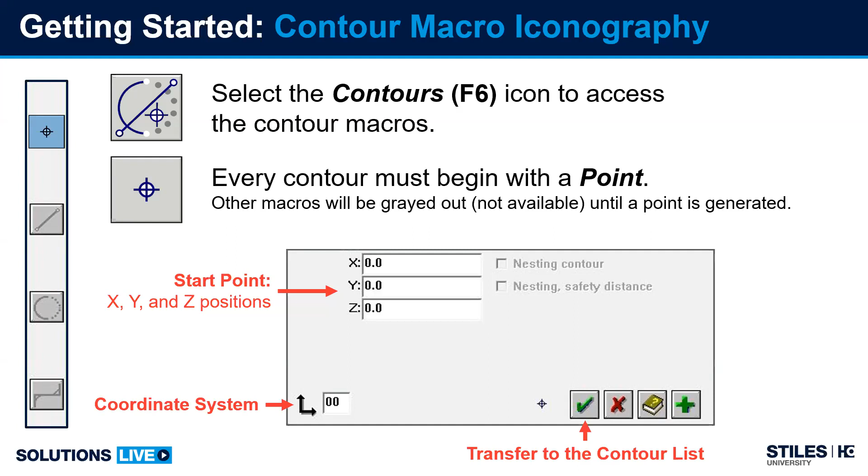So when it comes to lines, you have two options. The most common line is the endpoint. It's going to ask you where do you end in X and Y, but we have the ability to turn on the additional parameters and select a Z move. The other option is to determine how long is the line and what angle are we cutting.

So again, this is a valuable tool. I'm not certain that it's used that often, but again, it's a tool that's available for you. And again, we can make Z-axis moves with that. So let's talk about Z-axis moves. You have two options. You can tell the router to end the line at some point in the Z. Probably used the most. It's definitely the safest move.

We'll talk about what happens when we pick the second option, which is pitch. Pitch is an angular move. It's rise over run. But you have to be very careful. You're telling a line to move in a specific dimension in X, Y, and depending on how long that line is, your angle could project the tool well below the panel. So again, I'll show you some examples. Just have to be aware, we don't use pitch very often, but if you know that you have an angular move, you already have that number, so we can use that.

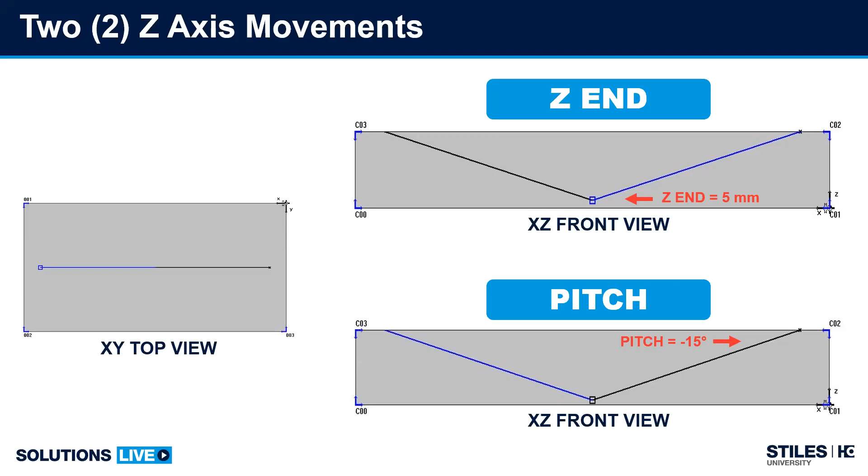So when we talk about arcs, you have 4 arc options within 5.0. Probably the first one, the arc radius and endpoint, is used the most. The arc 3-point is probably used second. So you can define the endpoint of the arc and what dimension is for the middle point. Very, very useful in creating things like valances. So I know the middle point of the valance, either the rail width or the height of the arc. I don't have to do any mathematics. I don't have to do any algebra to figure out what the radius is.

Now the middle two, they're very good for certain applications, but they certainly aren't used very often. So the arc center point endpoint is actually asking you where is the pivot. So imagine drawing an arc using a compass. You have to know where that pivot point is. So either you have to calculate that or you have to know that. So again, it's a useful tool, just not used very often.

Along with that, the third option: what is the direction of the arc, clockwise or counterclockwise? What's the endpoint? And what is either the starting or ending angle? Again, if you know the starting angle, that's great. If you know the ending angle, but without having to calculate those, we're back into the first or the fourth arc. Now, again, we can do Z-axis moves in an arc.

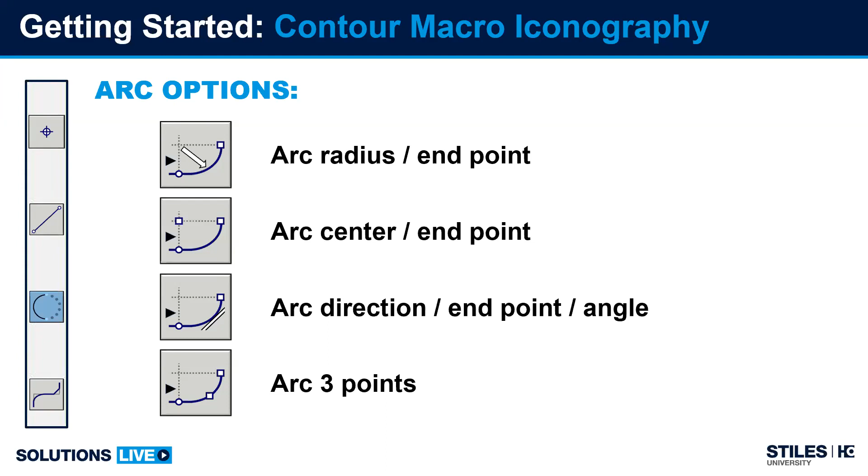And then the split is just the ability to take a contour line and cut it. So you can cut it at a percentage, you can cut it at a specific point. We may want to do this just because when the design was created, the start point really wasn't in a good spot. So we'll pick a long line and we'll actually cut that line in half. Once we've cut it, then that becomes a design element. So I can tell the router where to start in the contour split.

So again, let's talk about a caution. So here's two examples. I've got a pitch of negative 15 degrees. The top one is on a panel that's 50 millimeters thick. And then I did the exact same contour on a panel that's 25 millimeters thick. It doesn't take a woodWOP professional to realize that the 25 millimeter panel is going to be a very dangerous program to run. But there's a way that we can protect ourselves from this. The first one is definitely look at the front or the side view to actually see where the contour is moving in that Z element.

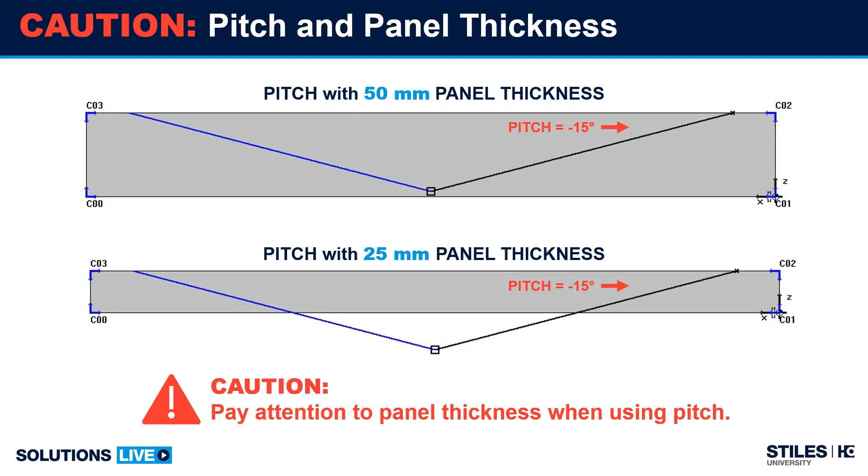So let's talk about how we protect ourselves. When you set up your tool, it's going to ask you for a length of the tool, that's the total. It's going to ask you for a collision length. For most of these applications, the collision length is the bottom of the tool where the tool's cutting. It gets a little more involved when you're talking profiling tools. But the working length is how much geometry do you have to work with. So if you don't set the working length correct, then the NC generator loses the ability to help protect you.

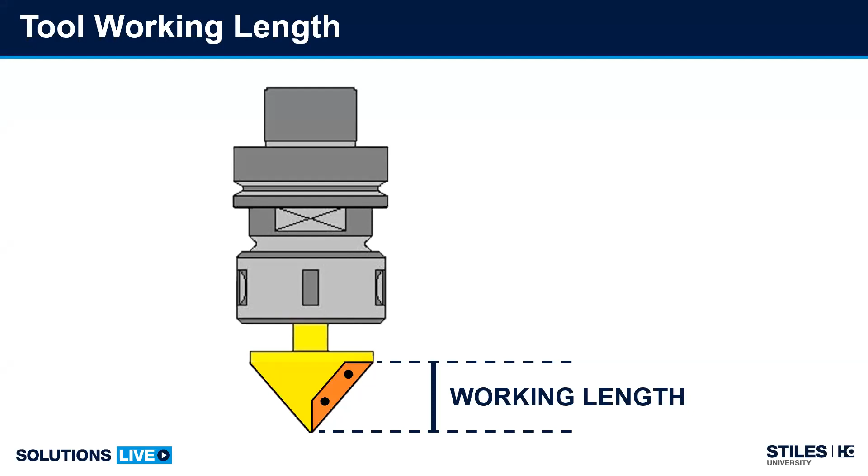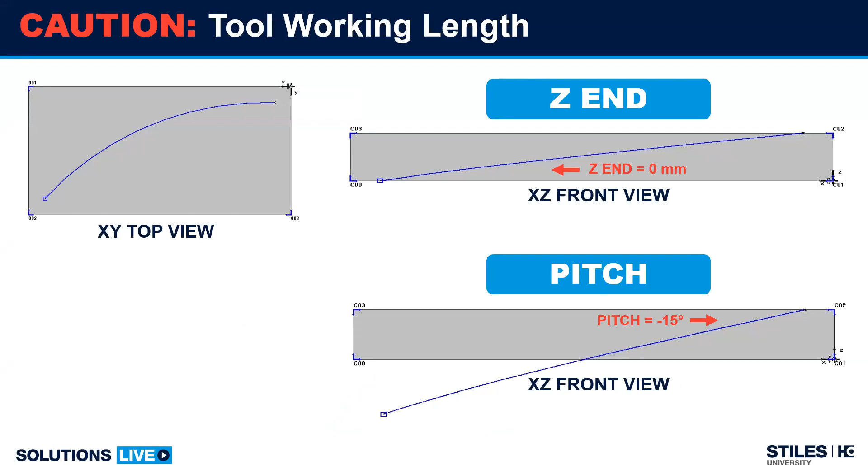So here's an example. The top view shows an arc, and then we have the Z end. I'm ending at the bottom of the panel, or Z0. But I did the same thing with the arc, only this time I did the pitch move, and I did a negative 15 degree pitch.

So here's my insert tool, and it's highly recommended if you're going to do these raised panel doors or these type of applications, try to get an insert tool. That way, when you replace the insert, the angle is always correct. If you get a carbide tool, every time they grind it, if they didn't get the angle exactly correct, whether it's a 45, a 90, or a 60 degree tool, you're going to have to go back and recalibrate that tool to make sure the corners are square. So again, try to get insert tools. It just makes them faster to get back into production. You don't have to recalibrate.

So here's an illustration of what happens with the working length. We know that we can follow down to this point, and at the top of the insert, that is the end of my working length. So in this case, if I had this tool set up and I push this through the NC generator and woodWOP, the machine's going to come back and tell me your tool's too short. You can't do this. But again, if I had lied to the machine and incorrectly determined the working length, I could easily take this tool and bury it into the panel.

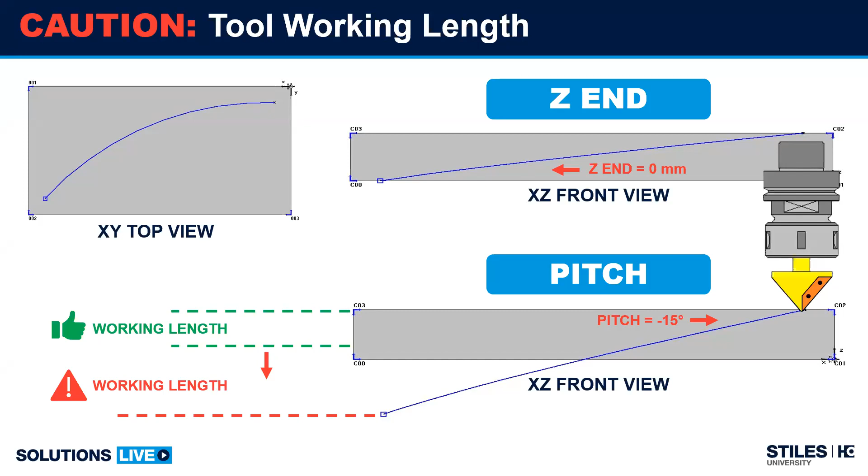At the best, I would just probably ruin the tool. But I could get to a position where I could push the collet nut and the whole tool holder into the top of the board, and now we're talking possibly misaligning the router motor, damaging the Z-axis ball screw. So again, Z-axis moves, you need to pay attention to what you're doing. They're not hard to do, but there's a few things you need to look at.

The last thing we need to talk about is what do we do with the Z dimension? So when we're cutting with a straight up shear, down shear tool, we can tell the router motor where to cut in Z, -2 millimeters because we're on a vacuum pod machine. We want to cut 10 millimeters above Z, but we're not moving in the Z dimension. So the tool stays at that position.

Anytime we do a Z dimensional move within the contour, our Z dimension on the router tool has to be relative. We have to put the @ symbol in there. If we don't, if we just put it at 0, then the tool's going to plunge to Z0, absolutely. It's going to follow the contour, but when it gets to the corners, it's not going to move up and down in Z. It's just going to move in a flat line to the corner.

So again, anytime we do a Z-axis move, the tool must be relative to the contour. So in this case, we put @0. If you want to cut a millimeter deeper, you could put @-1. So again, we have that ability.

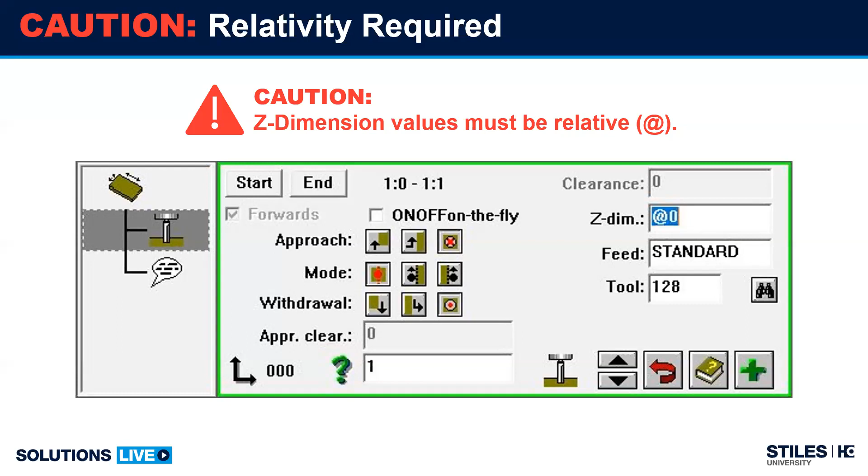So this is really what we're trying to do on this raised panel door. We want the tool to move to the corner, and then we have to do an X, Y, and Z move. My preference is to set up the parameters in the variable list so that I can control this very easily. So what we're ultimately looking for is this perfect corner. So when we make that XY move, if the XY movement is too small, then the tool comes up in Z, the corner is going to tend to bow in.

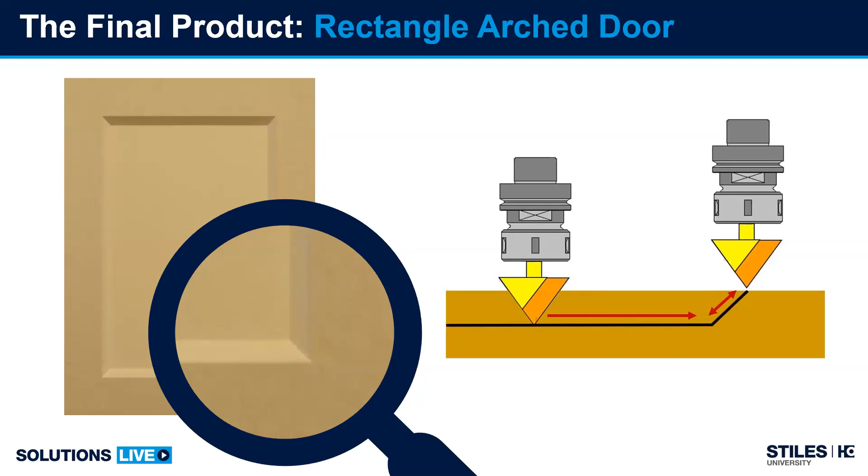So if you see the corner starting to have a small radius inward, we need to make that XY movement longer. If you see the corner starting to flare away or radius out from the corner, then your XY dimension is too long. So again, if we make a variable just for that dimension, it makes it much easier to calibrate this. And once you get one corner perfect, then naturally the other 3 corners are going to fall in line.

So here's my variable list. So you'll notice I have a V tool and a V feed rate. I want to be able to change that V point tool. So maybe I'm going with a 45-degree tool, maybe it's a 60-degree tool. The 60-degree tool, you may have to do a little calculation to figure out what that XY movement is. I want to control the feed rate. Am I cutting this into a plywood door? Am I cutting it into hardwood? Am I cutting into MDF? I want to be able to control that feed rate.

So we want to be able to control in inches, the length, the width, and thickness of the panel. And then I have 3 very important variables for me. RS. So in this case, I decided to make a panel that was completely balanced. So rather than having stile left, stile right, rail top, rail bottom, I just made a variable for rails and stiles. So whether they're 2 inches or 2.5 inches, I change one number and the whole drawing changes.

I have a profile depth. How deep do I want that tool to provide that profile? So in this case, we're using a 45-degree beveling tool. I want that profile to be 1/2 inch deep. And then the last one we talked about, I need a variable for XY. How do I move the tool in the corner? How do I produce that up movement?

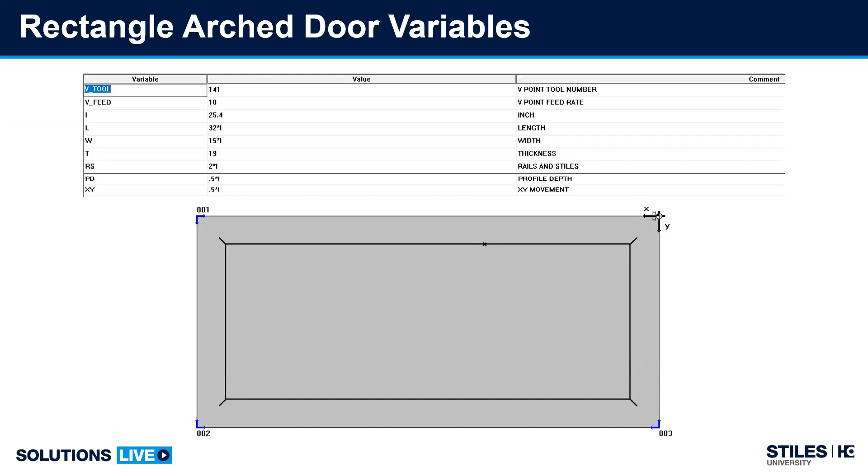So let's talk about getting into the board. Most door manufacturers do not like the on and off the fly option. On and off the fly works great for panel sizes, shelves, things like that. But what happens in the door is our V-point tool is going to ramp in on the on and off the fly. It's going to do an absolute stop at the bottom, a couple of milliseconds. But there's a little bit of vibration. And then the tool is going to go around the door and produce all 4 corners.

And then it's going to come back to that same location, do an absolute stop, and then ramp out. Well, that absolute stop and that vibration is going to potentially cause a dimple. And if it's a paint grade door or if it's going into a membrane press, that dimple has a really good chance of showing up. So most door manufacturers produce their own ramp in and ramp out.

So in this illustration, I have a starting point and an ending point, and then there's a flat between them. So if you look at my start point, I'm at 1/2 the panel length and I backed up 100 millimeters. The Y is set at the width of the board minus the rail width, and I'm at the top of the panel. When I make the ramp in, I move 75 millimeters.

So relative at 75, Y stays at 0, and now I go thickness minus the profile depth. So that produces my ramp in. I cut around the door, and then when I come back, I end up at 1/2 the panel length, and then I move 75 millimeters while I'm coming up in Z, and that's my escape. So again, the caution at the bottom: when we assign a tool to this, your Z dimension for the tooling has to be a relative command.

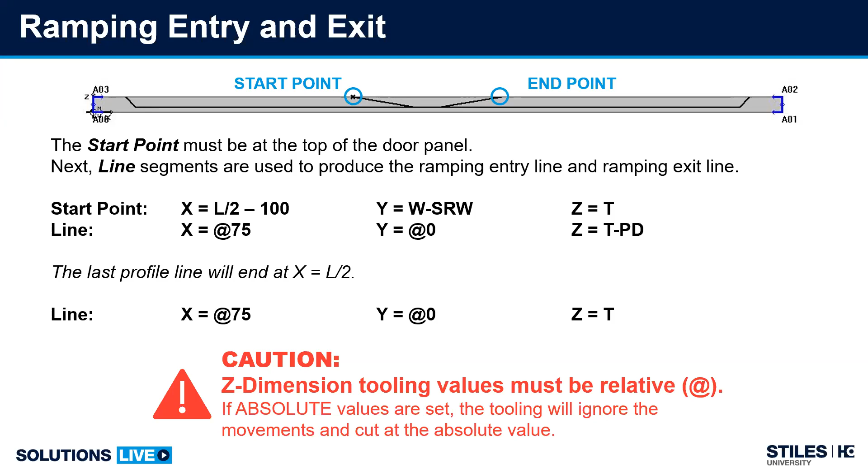So let's talk about the corners. In this case, I'm going to ramp in. When I get to this corner, I'm going to move positive in X at XY, but Y has to go negative. So at XY, at minus XY, and I come up to the thickness of the board. Now I need to reverse and come right back down to the bottom. So in that case, X goes negative, Y goes positive, and we come back down at minus the profile depth. That's how you do a corner.

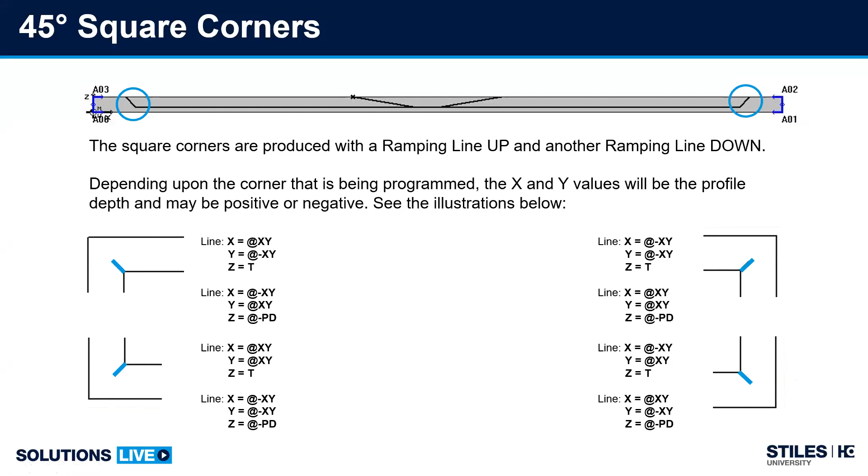It just depends which corner you're in and whether X moves positive, Y moves positive. In this case, X moves negative, Y moves positive, and the fourth corner, X goes negative, Y goes negative. It's not difficult, but again, it's an extra couple steps when we're programming this door. So what I want to do is demonstrate how to make this Z-axis move on the drawing.

So I'm going to start my woodWOP program. So again, here's my variable list. I kept it up, but I have no contour. So here's my V tool, my feed rate. In this case, the door is 32 inches by 15, 19 millimeters thick. Then my rails and stiles are 2 inches, half-inch profile. And in this case, I'm going to try the half-inch move.

So again, when I do my test cut, if I see the corner bow in a little bit, maybe I want to take that XY dimension and make it 0.55 and then do another test. But if it's an insert tool and it's a high quality tool, then in theory, XY and profile depth should be the same number. So let's program this door. So I have to go into F6. That brings up my contours.

So I'm going to pick up the start point. And we're going to go L divided by 2 minus 100 millimeters. This is going to be width minus rails and stiles. And we're starting at the thickness of the panel from coordinate system 0, 0. We hit the check mark. Here's my contour. Now, if I go to F9 and look at the XZ view, I can look at the front of the panel. So here's my contour in the Z movement.

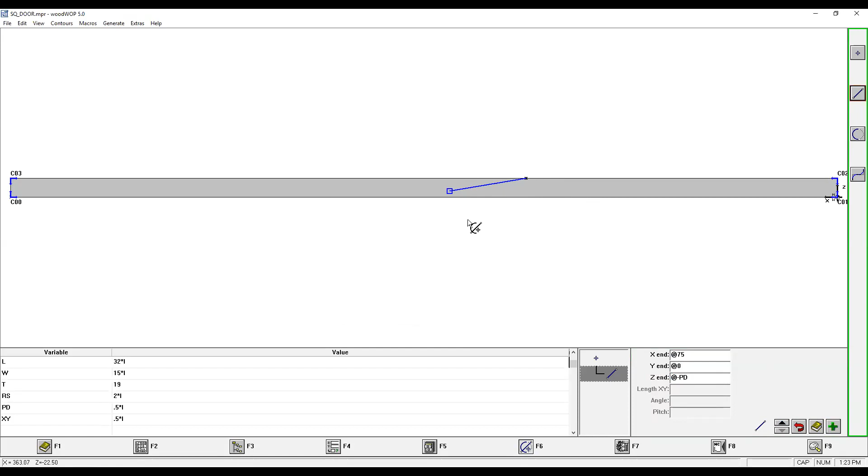So now I need to go to the corner of the panel. Okay, so let me go back to the top view. Pick up a straight line again. So now we're going to end at length minus rails and stiles. Y stays at 0. I'm not doing a Z-axis move, so I don't need to turn it on. Okay, now we have to do the corner. So from our 0 point of the panel, we know that X needs to move positive, Y needs to move positive. So we grab a line. We're going to turn on the additional parameters, go to Z end.

So now X goes at XY, Y moves at XY, Z goes to thickness. So very short line. Now if we look at the front of our panel, we now can see the line moving up in Z. So here's the easy way to do this. When you go up in Z, you have to come right back down the same line.

So I'm going to copy and paste, open up this line, and now X goes negative, Y goes negative, and we tell it to go at minus PD. When you update the screen, my router is now going to go up in Z and back down in Z. We have to do that in all 4 corners. So the next thing I need, a straight line.

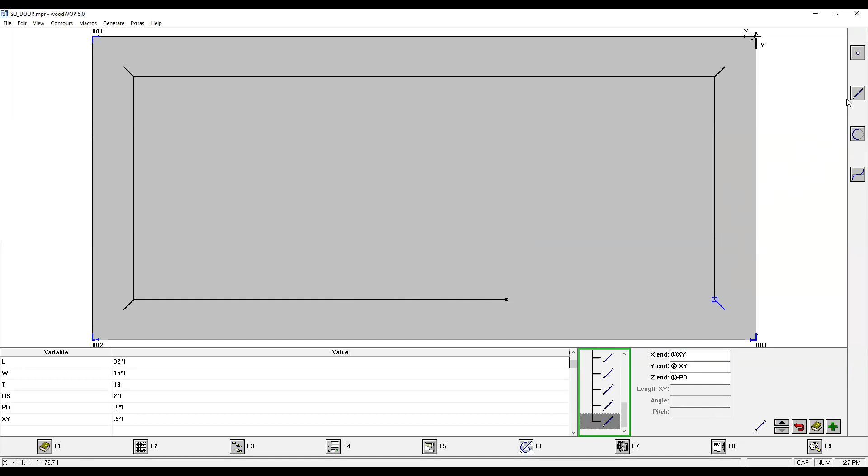Okay, so last two lines. So we don't want this line to end where we ramped in. We want to overlead that. So tell the line to end at L divided by 2 at 0. So let's look at the front of my panel. The ramp in comes here, but this line has overled by 25 millimeters.

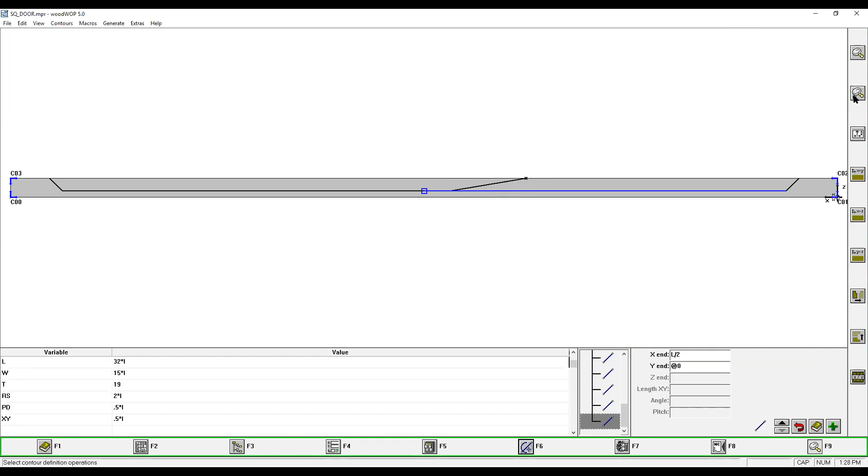Now we're going to pick a new line. X is going to go at 75 millimeters. Y stays at 0. Turn on Z and go to the thickness of the panel. That's my raised panel door.

So if we want to put a flat tool on there, I just create a rectangle in the middle so that my flat tool can cut. I don't need the corner moves for that. And then I could possibly use that same inside shape without the corners to put a profiling tool. So I would have a raised panel bit.

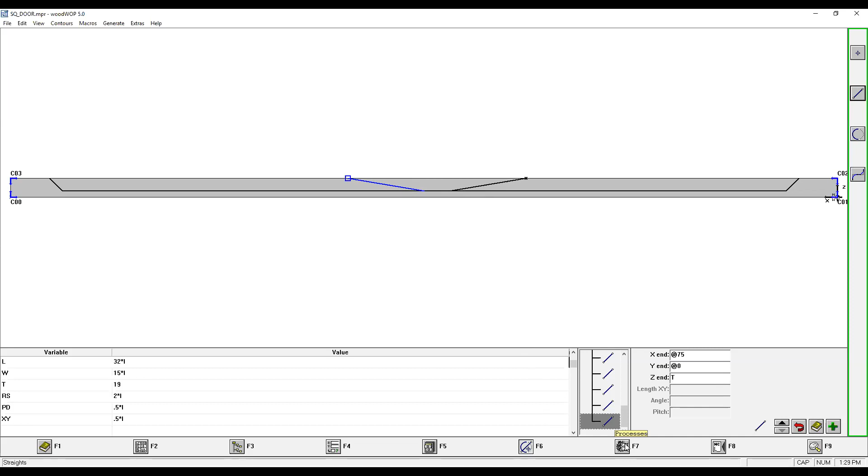My order of operations, I would do the flat tool, then I would do the V point, and then I would do the raised panel. That way I'm not running the risk of having the tools overcut each other. Okay, so now we need to put a tool on this. So we go back to F7, pull up the router bit.

Now this is an open contour. The start point and end point don't touch. So we have to tell it where to start. So contour 1, element 0, and we want to end at contour 1, element 15. We do not need on and off the fly. We created our own ramp. So we're going to come in vertically. It's a V-point tool, so we want to cut on the center line, and we want to leave vertically.

Now here's the big one. If I don't select this as relative, then the tool's going to stay absolutely at 0. So we're going to go at 0. Feed rate, so this is now going to be V_feed. And my tool number, V_tool, we hit the check mark.

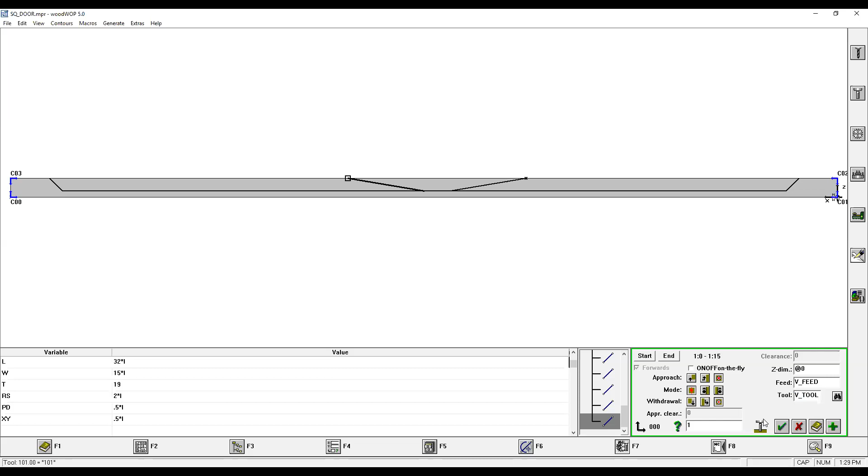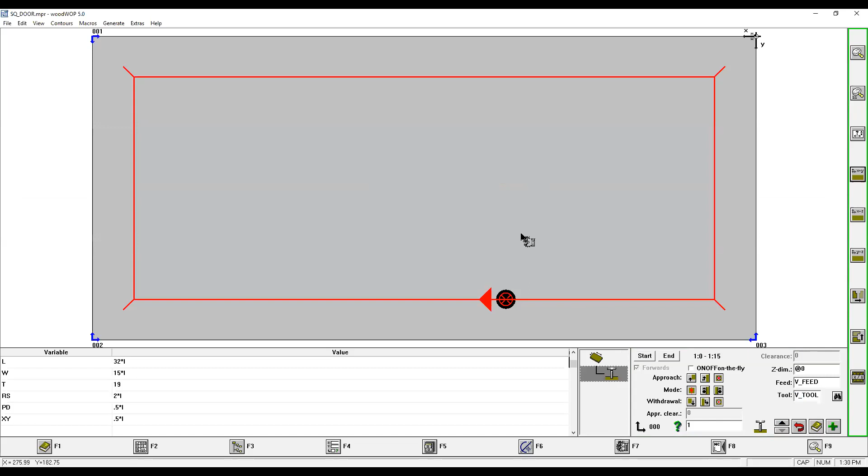So one other disadvantage to 5.0, and it's just that they didn't give us this ability, I can view the tool from the top, but we don't have the ability to view the tool from the edge. So if I go back to the top view, here's my router tool. Control H turns that on or off. Control J walks it forward.

And Control G would walk it backwards. So again, not a difficult thing to do. We've seen this also used when making fluted columns. So rather than taking a coving bit and plunging at the start point, going to the end and then lifting, that plunge generates a tremendous amount of heat. So in a fluted column, we could actually see that tool pass that heat onto the part.

And if anybody's ever cut cherry or Eastern hard rock maple, they burn if you look at them wrong. So one way to help limit the amount of heat transference is to do a very short ramp in. It kind of adds a very cool architectural look. If you make the ramp a little bit longer, it makes the top and bottom of the fluted column more of an arrowhead. But we've seen that, we've seen it in the raised panel doors. So there's multiple applications as to why we would pick the Z-axis move in woodWOP.

What do you think, Ian? Sounds great, Phil. Thank you so much.

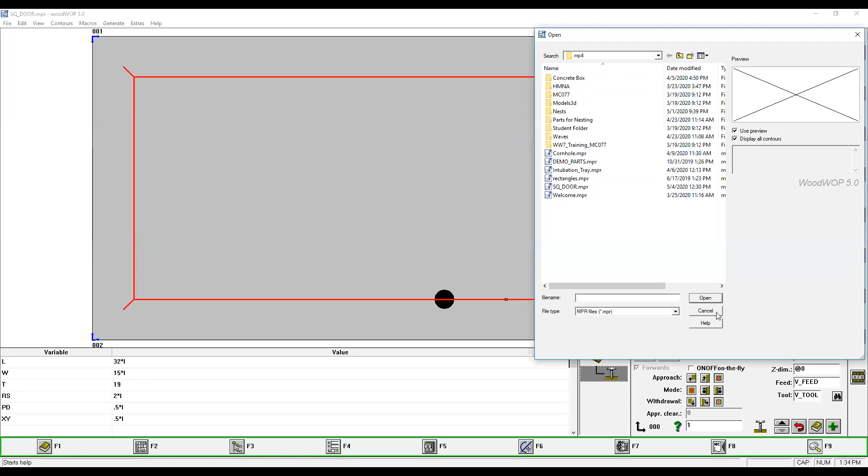Well, I can do one very quickly here. So let's go to File, New. We're going to make this panel square. So we'll make it 600 millimeter square. We'll make it a little bit thicker, 30 millimeters. I'm going to give myself an edge. So border width, BW, and that'll be 50 millimeters. So again, we go into F6, grab my start point. So L divided by 2, and border width, and the thickness of the panel.

Okay, so I'm just going to do a helical to the bottom. But if you truly wanted to make this more of a screwing operation to the bottom, we can do that. But very quickly, I just grab the arc. So where are we ending? We're ending at the same place, L divided by 2 and border width. What is the radius? Well, that's going to be L divided by 2 minus the border width.

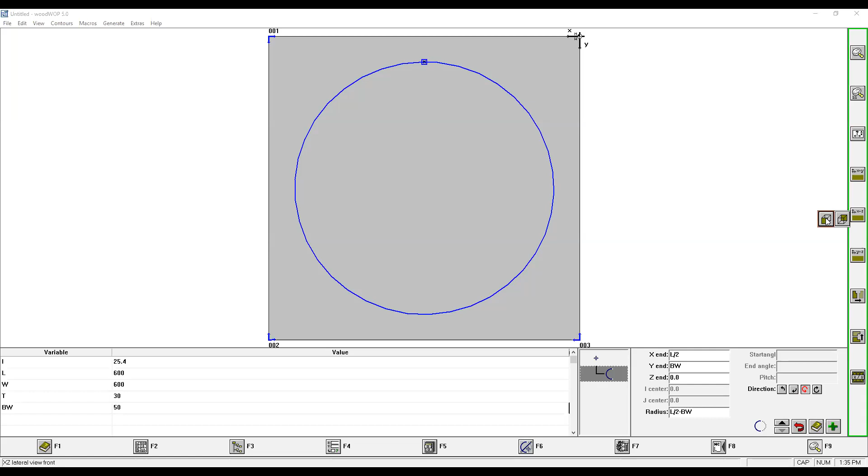We're going to do a large radius, but I also want to go into the additional parameters and turn on Z. So where do you want to end? Z0. So we're going to do a large radius in the clockwise direction. So we hit the check mark. There's my full circle, but if I go to the view, I started here at the thickness of the board. In one swift motion, I ended up down at the bottom of the panel.

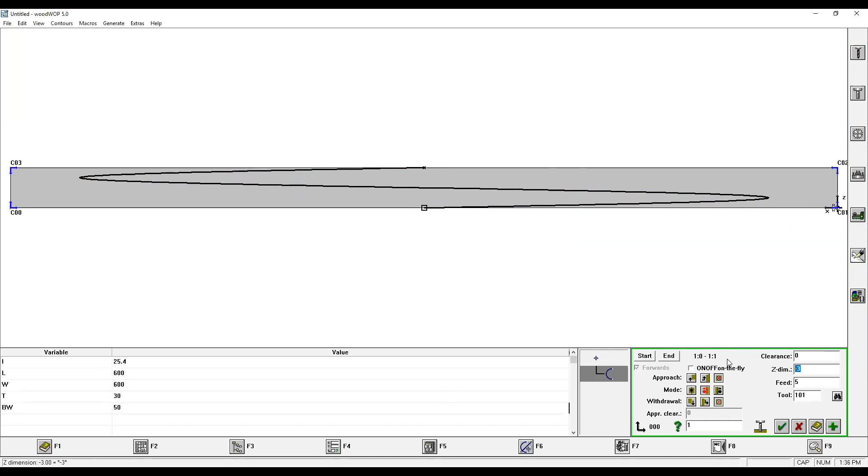So again, when you go to your router bit, it's still an open contour. Tell it where to start, where to end. Vertical in this case, maybe I want to cut to the inside of that. So I would cut left, vertical out, and again at 0. Select the tool number.

Now, if you wanted to make more radiuses in there, then your Z dimension would change. So if I go back into my contour, now I want this not to end at Z0, but T divided by 2. So then I can copy and paste. This arc then ends at 0.

So that quickly, I was able to take one contour, take it to half the panel, and then take the second one from that position to the bottom. Hopefully that answers that question. Yeah, the person who asked that question said thank you, Phil. So that was a great explanation of that complex procedure pretty quickly.